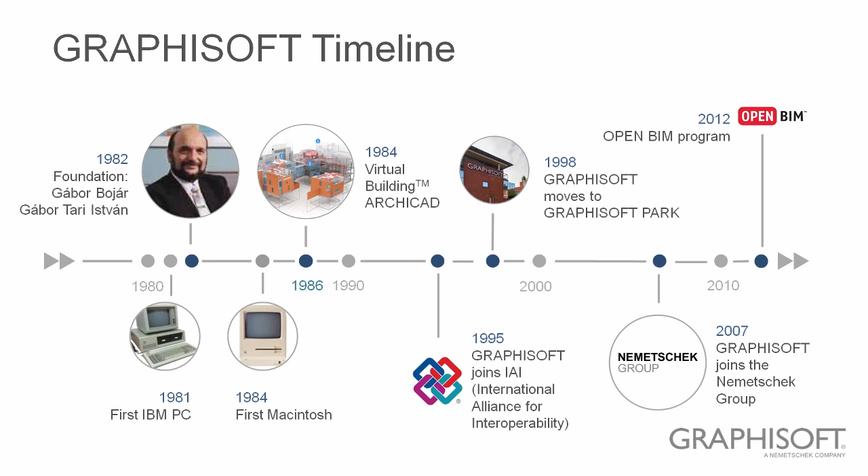This slide shows some important details in the lifetime of Graphisoft. You can see the portrait of our founder, Gabor Bojar, who already in 1982, one year after the commercial introduction of the very first personal computer, succeeded in writing a computer program for 3D modeling and clash detection on a PC. Soon after, our founder discovered that the best customers for his invention were architects. So ArchiCAD, the first BIM application for architectural design, was born. Only at that time, we called our method virtual building, not building information modeling.

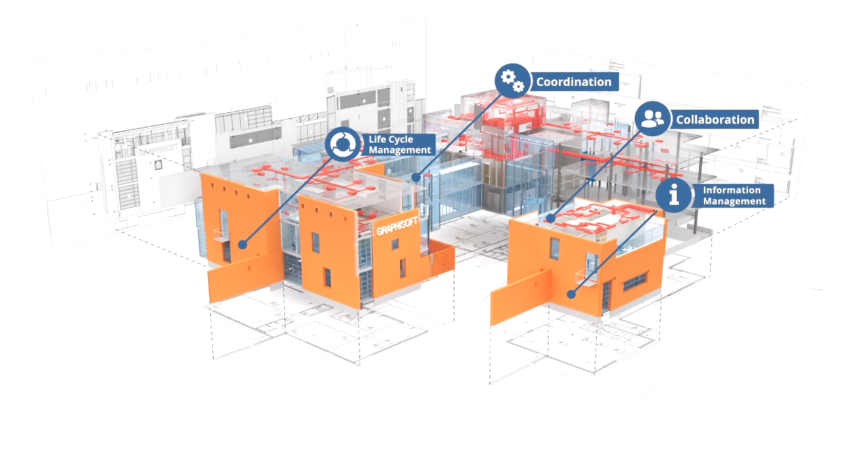What do we mean by BIM? What is building information modeling? Well, according to the AIA, BIM is mainly concerned with the digital representation of buildings, but has also many other aspects, like shared information, where you collaborate with the different stakeholders of the construction project throughout its entire life cycle. In my presentation, I will try to discover all these aspects and show you how you can do building information modeling with Graphisoft solutions.

Graphisoft's solution ecosystem is all about building information modeling. ArchiCAD, our BIM authoring tool, is the preferred design tool of more than 200,000 architects worldwide. BIM Server and BIM Cloud are solutions for smooth and intelligent collaboration for architectural design teams of any size. With BIMX, for BIM Data Access, our award-winning mobile application, even non-professionals can easily access and view the BIM models which were created by ArchiCAD.

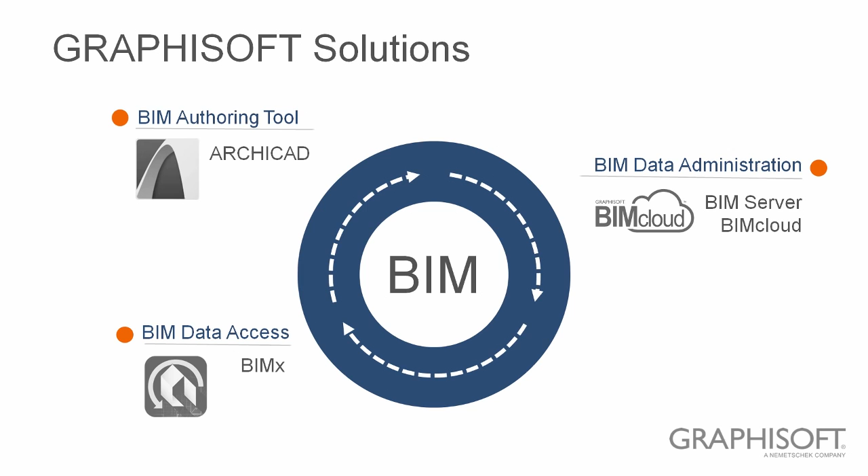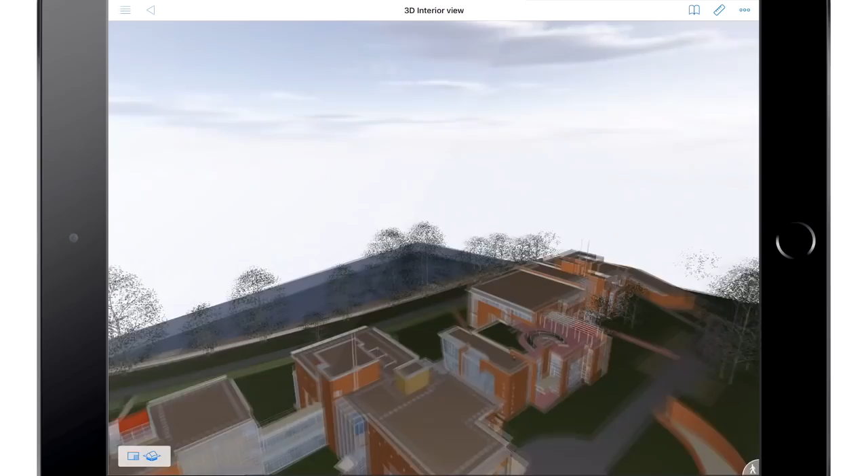Let me start my presentation with BIMX. You might have noticed I have already been showing you these slides in BIMX. BIMX is also a great presentation tool. You can freely download it from the App Store. I'm just switching to the 3D model to show you our headquarters in Budapest. These are the two buildings where all the software development of our superb products is taking place.

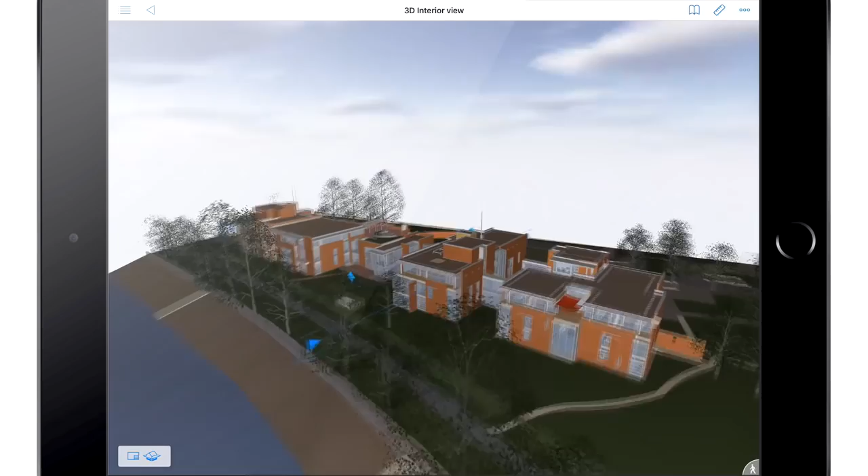The facility itself comprises two main buildings designed by two famous Hungarian architectural firms, Építész Studio and Lukács and Vikár Architects. See how easy it is to visualize the BIM model and orbit around. With the pinch zoom, you can explore any detail from the outside or from the inside. Let's zoom a bit closer to the front door.

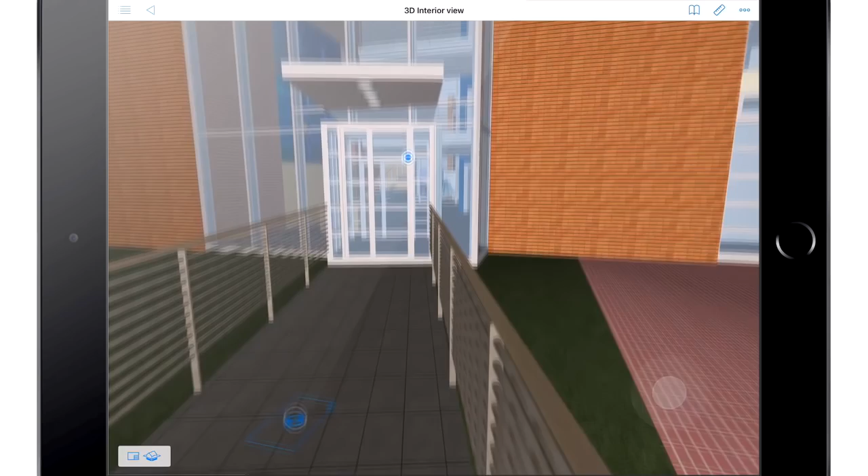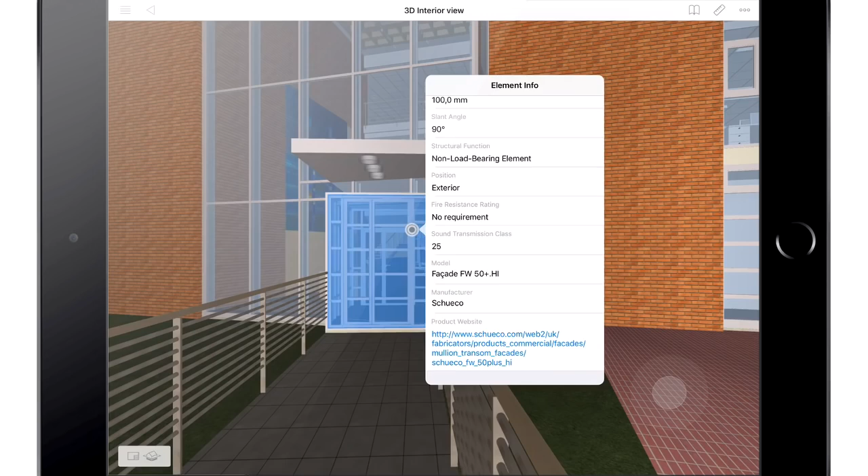Building information modeling is all about information. You notice a rich set of metadata can be attached to the model elements. Even web links can be attached to building elements in ArchiCAD. These then can take you to the manufacturer's website for further information about the end product. These capabilities make the BIM model the perfect information management platform for the entire life cycle of the project.

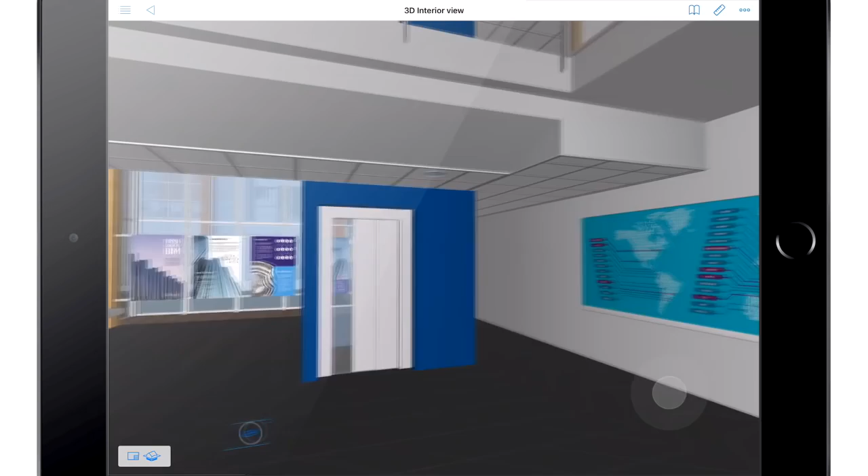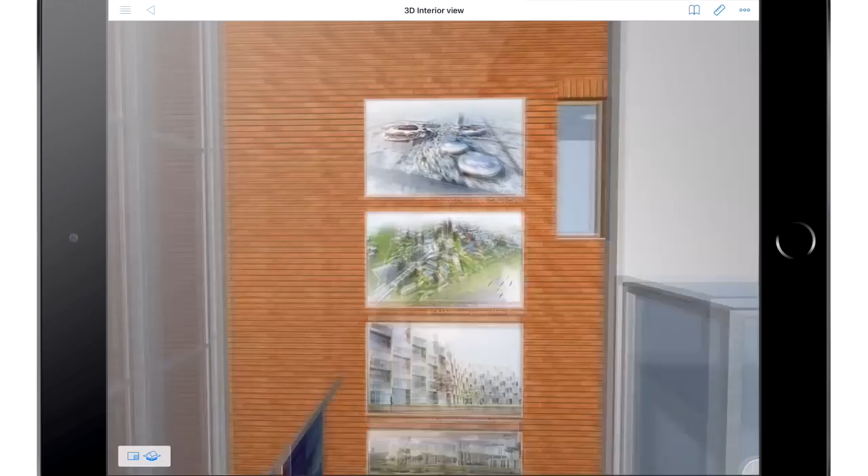Let's go inside the building. You can easily walk around just as if you were playing a computer game. This map shows all the locations in the world where we have direct or indirect representations. Let's walk upstairs. These virtual tours help the clients better understand the design and get familiar with the relations between interior spaces.

Please note these great projects on the wall. All these buildings were designed with ArchiCAD by famous architectural design offices such as BIG, UNStudio, and others.

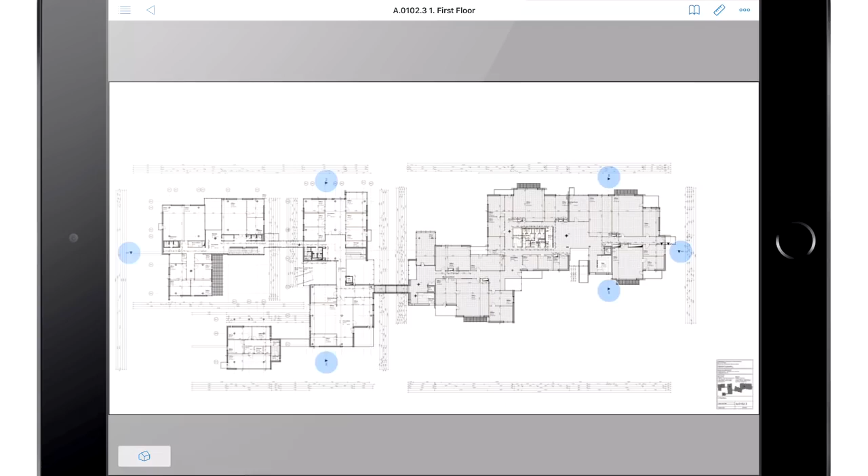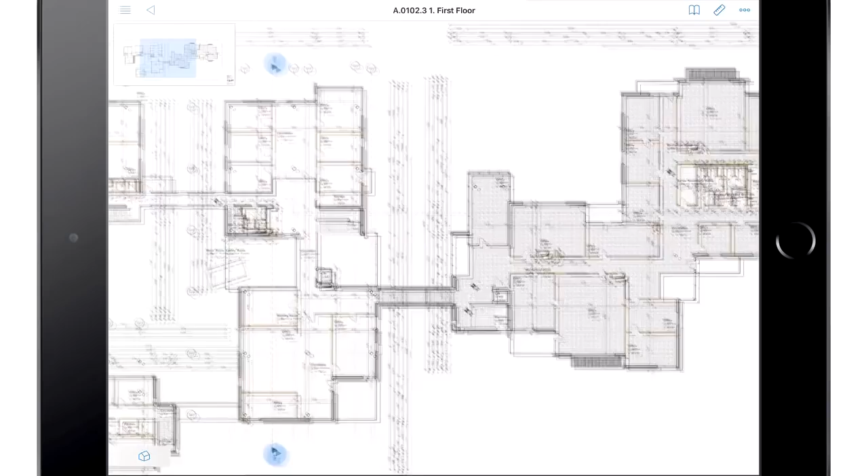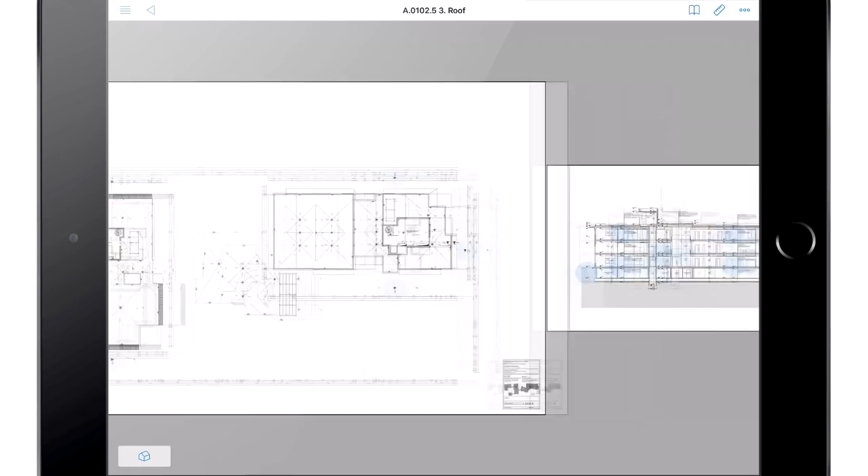Not only the 3D model, but also the entire construction documentation can be stored and viewed in our BIMX app. It means paperless construction sites. Construction managers can just walk about the construction site with an iPad in their hand, having the entire construction documentation at their fingertips.

A unique feature of BIMX is that any 2D document can be placed in context of the 3D model, and the 3D model can be cut by the 2D document. This allows for much better understanding of the 2D documentation when viewed together with the 3D model.

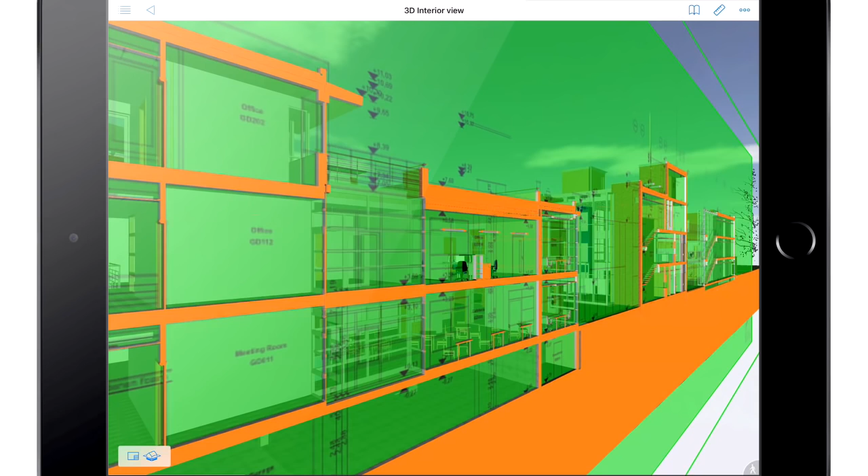Like in the case of this section view, it is much easier for non-industry professionals to understand the 2D information when the section is placed across the 3D model. You can also move the 3D cutting plane to reveal the interior structure of the building at any location.

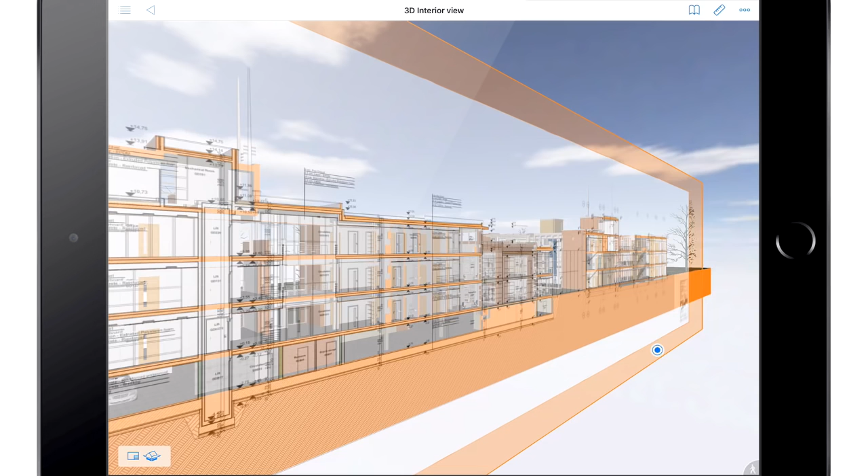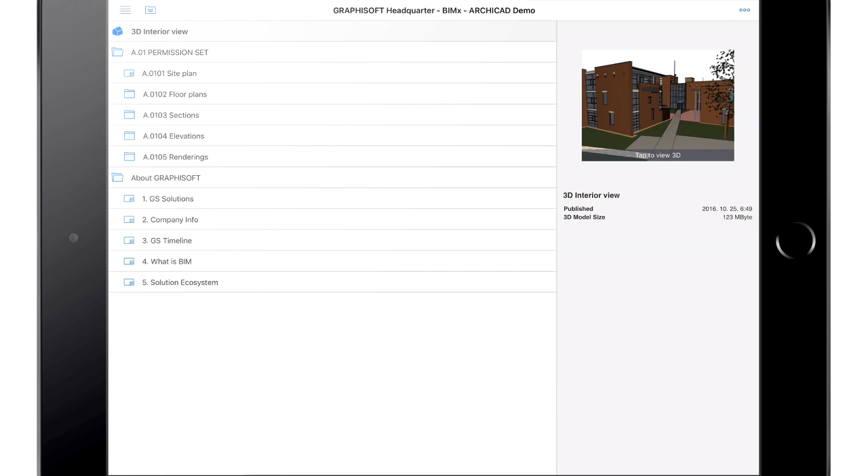Now that you have seen how simply you can access and view the BIM model in BIMX, let me show you how easily you can create the BIM model in ArchiCAD. Firstly, I would like to show you that ArchiCAD is a true BIM authoring application. Then, I will show you that ArchiCAD is very intuitive, and you can have lots of fun while working with it. Lastly, I will give you everyday examples for how you can boost your productivity when working in ArchiCAD correctly in the BIM way. Let's see now what it means to work in ArchiCAD in a true BIM fashion.

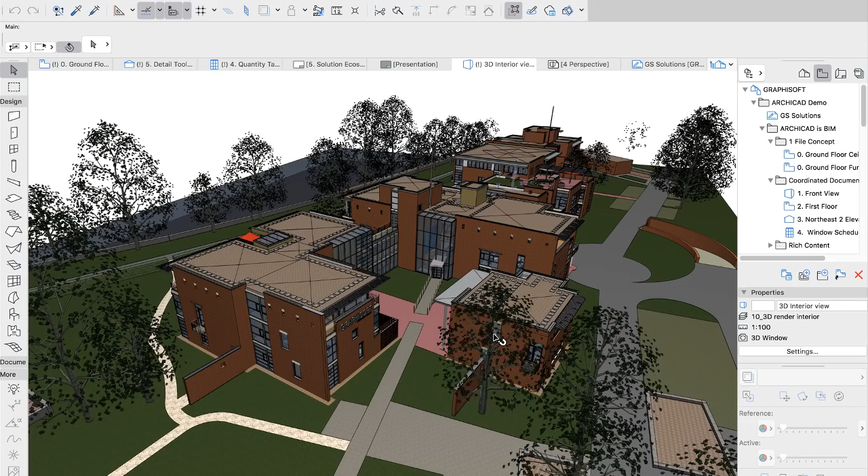This is the same 3D view which you have seen in BIMx. We are just now in ArchiCAD.

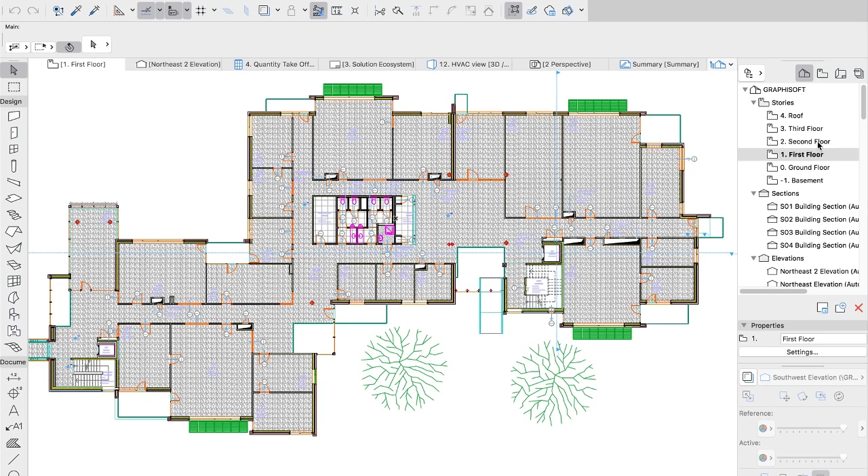Having a building information model in ArchiCAD means all the project-related documentation is stored within a single project file. The Navigator tool allows you to easily overview and access any part of the documentation. For example, in this case, I am browsing among the floor plans, sections, and elevations.

The information and its graphical representation on a view depends on the architectural context. For example, the false ceiling plan has completely different content and style of representation than the furniture layout.

Navigator allows you to save and organize the different views of your BIM model in a fully customizable folder structure so that you can quickly access them at any time.

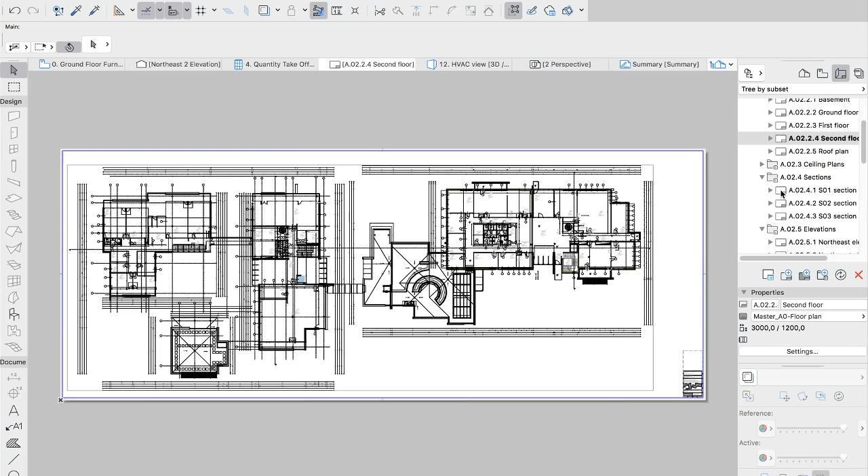Not only the building model related information, but also all the relevant drawings, schedules, and layouts are stored in the project file. All the drawings which make the architectural documentation complete are also an integrated part of the ArchiCAD project. In Navigator, the layout book lets you create and organize your final architectural layouts in any fashion you like.

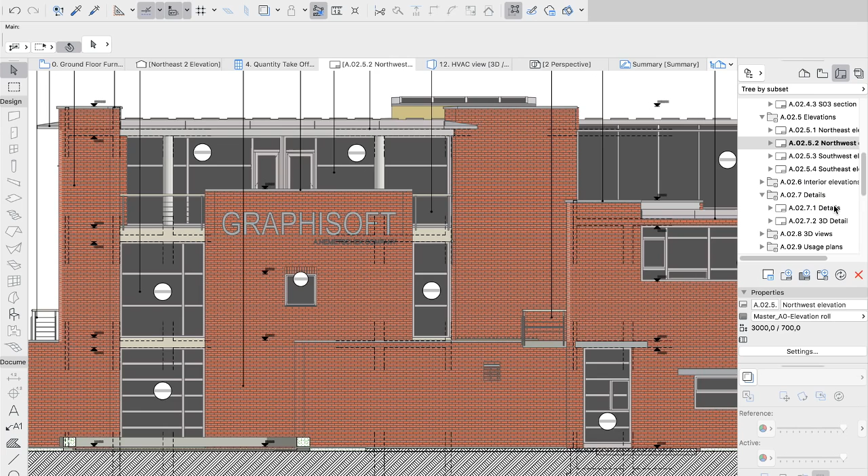The most important aspect of building information modeling is that all of the documentation, all of the different views, are live links to the central building information model. Therefore, you need to make a modification just once in a view, and all other views update instantly. Your documentation stays coordinated at all times. Let's look at an example.

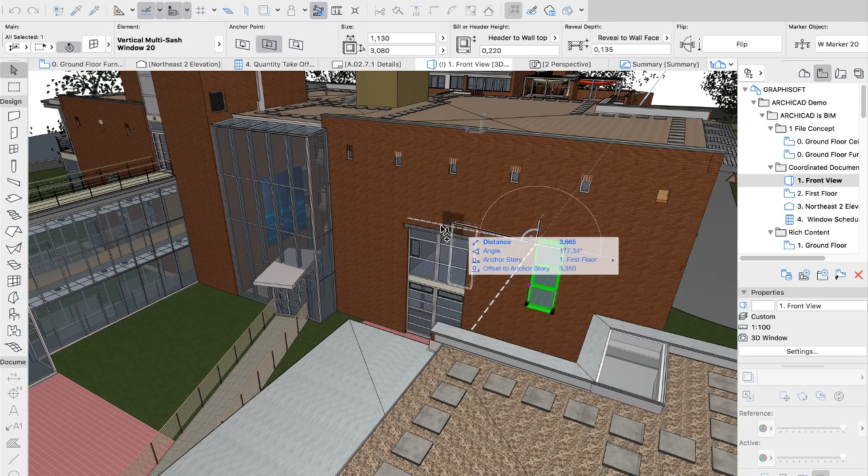You can modify the BIM in any view you like. Let's create a copy of this window right here in the 3D perspective view. As you can see, it is a very simple exercise. You can easily work accurately in the perspective view with help of ArchiCAD's guidelines.

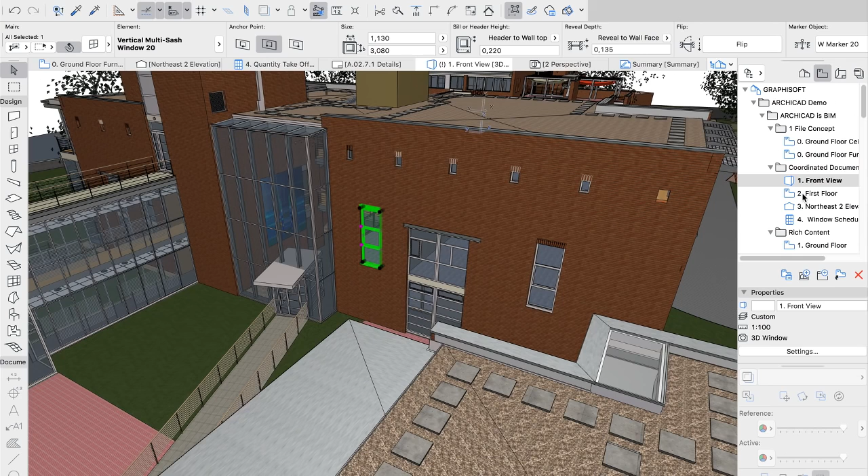Now let's have a look at the floor plan. As you can see, the window we duplicated in the 3D view is showing correctly on the floor plan. Let's see how easily you can further fine-tune this window.

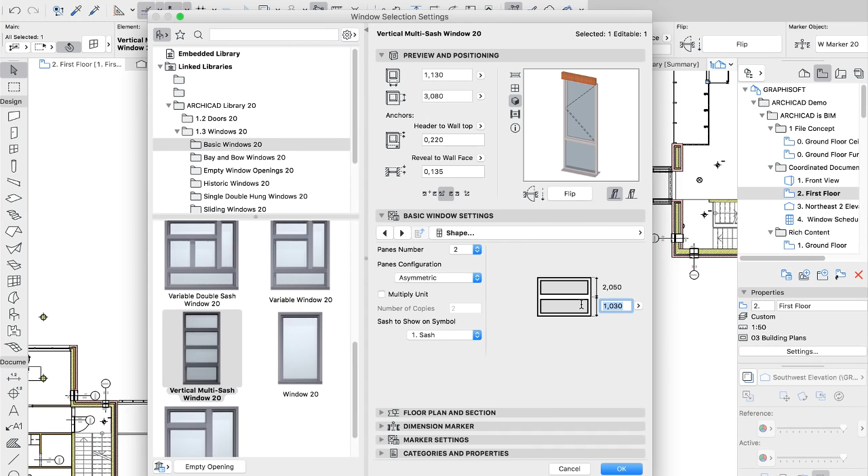Windows, doors, and objects in ArchiCAD are parametric library parts. One object can store a complete product range. They can represent plenty of variations of a construction element. You can comfortably edit the different window parameters through a user-friendly graphical interface. Let's modify the number of window panes and the bottom pane height.

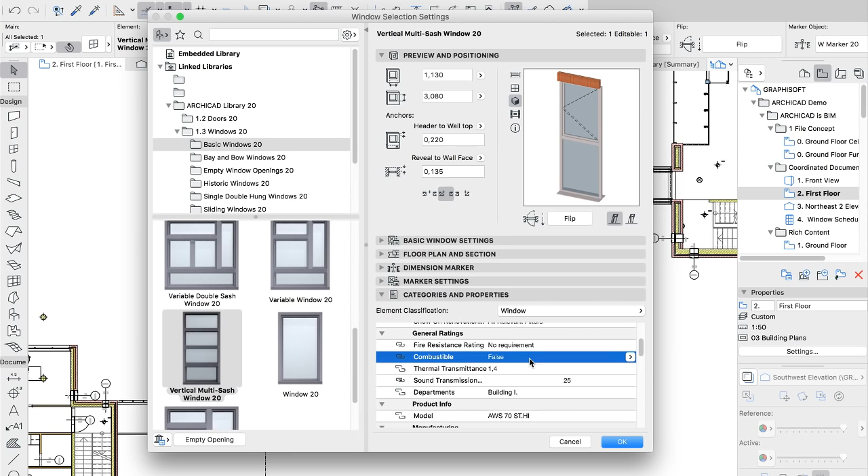Building information modeling means, in addition to the physical parameters, you can store a rich set of metadata with the building elements. For instance, in case of this window object, we can access its fire resistance rating, sound transmission, and many other important properties. The geometry of a window can be edited graphically in the 3D window or in an elevation view. For example, I can easily stretch the height of this window or change its transom height to align with the other. Graphical editing makes the use of ArchiCAD really enjoyable for architects.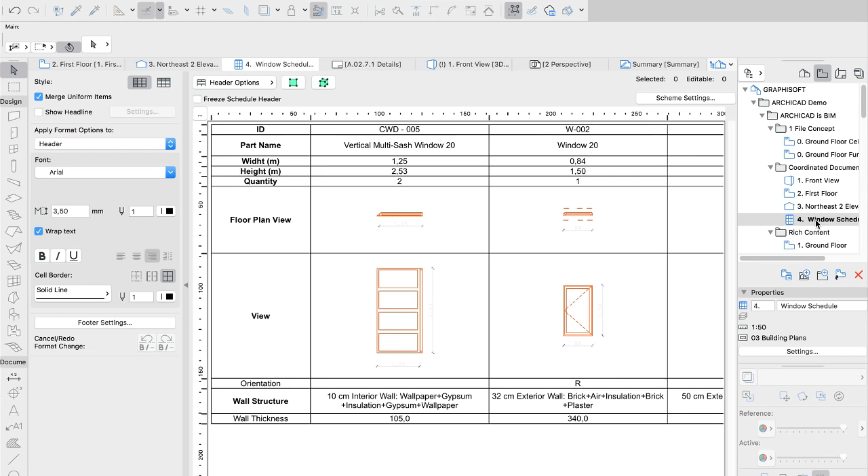At any stage of the project, you can instantly extract any information of the building information model as lists or schedules. Even graphic schedules can be created. Let's take this window schedule as an example.

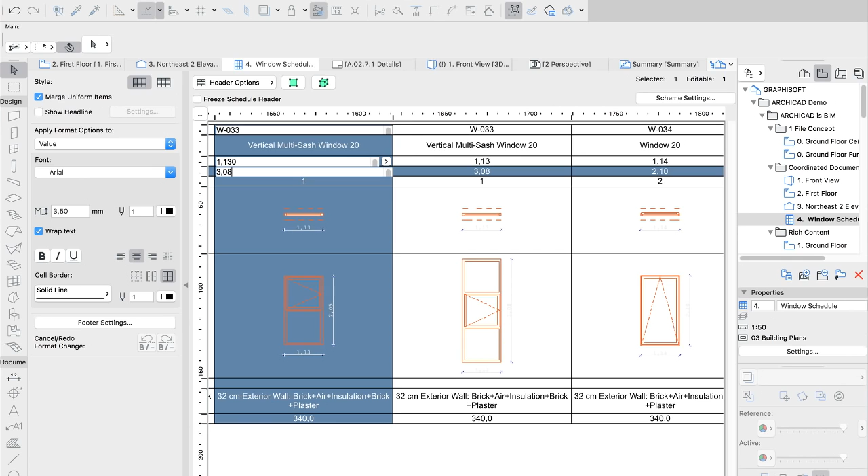Just like in any other views in ArchiCAD, you can edit the model elements also in schedules. Let's change the height of this window to be exactly the same as this other window, 3 meters and 8 centimeters. Let's check our elevation. As you can see, the elevation has been updated and the window height has been changed.

You now probably realize how much time and effort can be saved by working in a real building information modeling fashion. You only have to build up your building information model once, and any changes you make will be automatically updated in all other views instantly.

ArchiCAD offers a huge productivity gain compared to traditional 2D CAD-based workflows. ArchiCAD significantly reduces the time spent on project modifications.

Another important aspect of a BIM application is the type of local content that comes with the software, and how easy is it to customize these ready-made construction elements. To check this out, let's first visualize only part of this model with help of the marquee tool and furnish the entrance hall with some seating furniture.

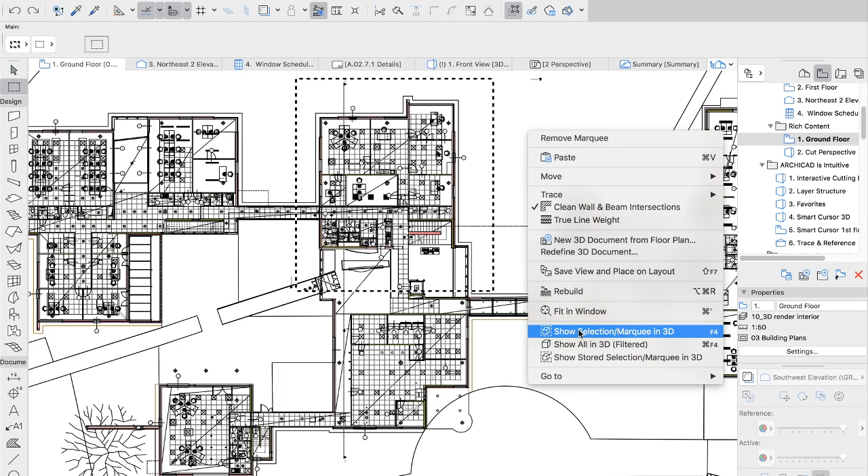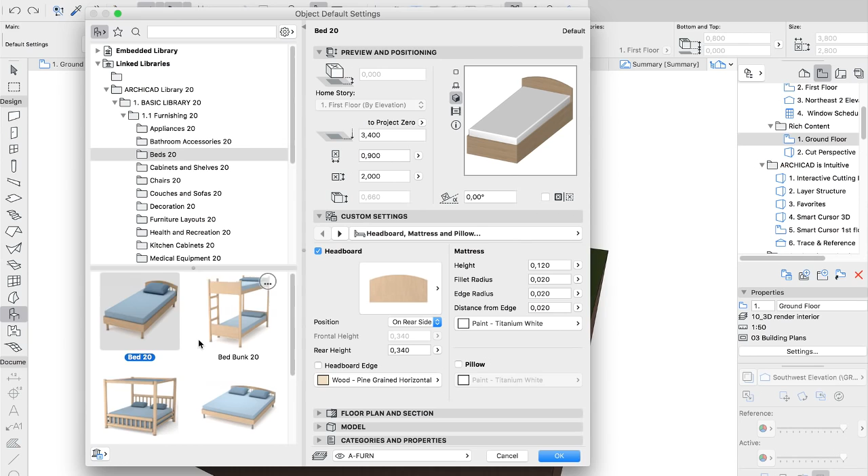ArchiCAD comes with a pre-installed library of more than 1,000 generic architectural elements. These objects are parametric in their finest details and are customized to your local standards. Through changing their parameters, these elements can represent numberless different products, all in very compact file sizes, due to the smart GDL programming language invented by Graphisoft.

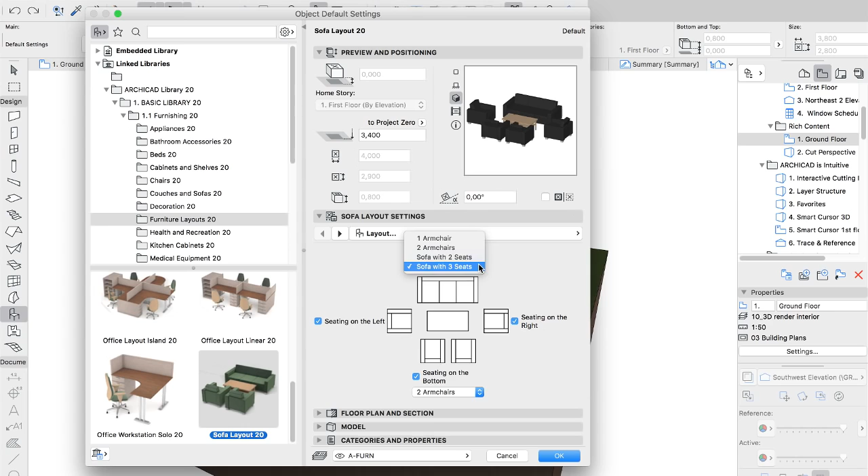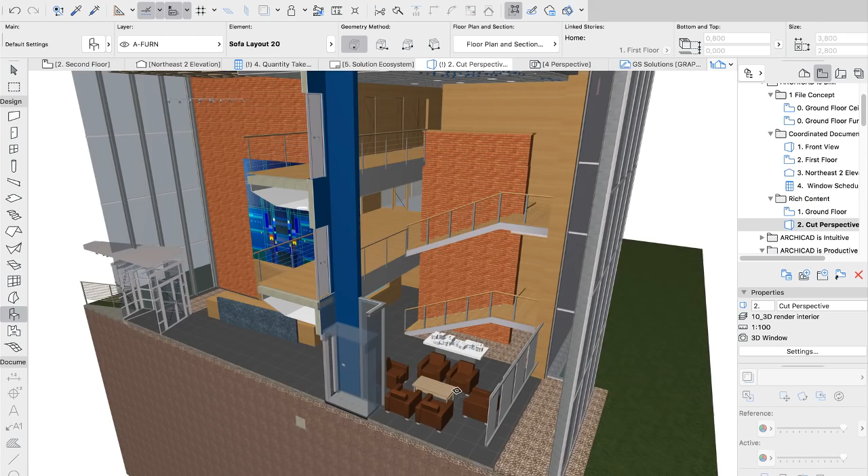For example, let's change the layout of this furniture piece. You can easily modify the number and type of sofas on each side. Let's have 2 armchairs on the top side, just like we have them on the bottom side. Besides the geometry, 2D representation as well as the materials of the objects can be freely customized. Let's change the materials of the armchairs to be leather. And voila! With only a single click, you can place the object into the entrance hall.

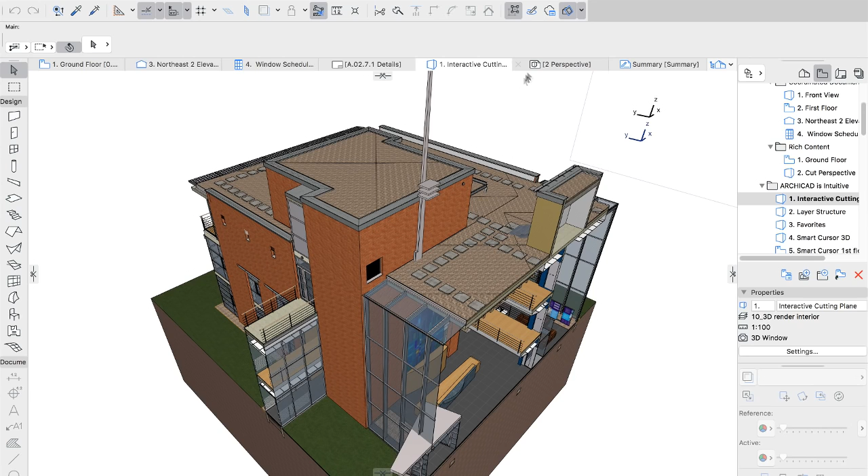So far, I have shown you the essence of what it means to work with ArchiCAD, a true BIM authoring tool. You have seen how much time and effort can be saved when working with a building information model. In the next part of my presentation, I would like to show you some intuitive solutions that will make working in ArchiCAD lots of fun. After all, it is very important that you like working with the tool you spend most of your day with.

When elaborating a small portion of a large model, it is imperative that you can easily cut down the model to the actual part you want to be editing. Interactive cutting planes provide a simple way to reveal the internal parts of the model. Besides its practicality, it is also very spectacular and fun to use, isn't it?

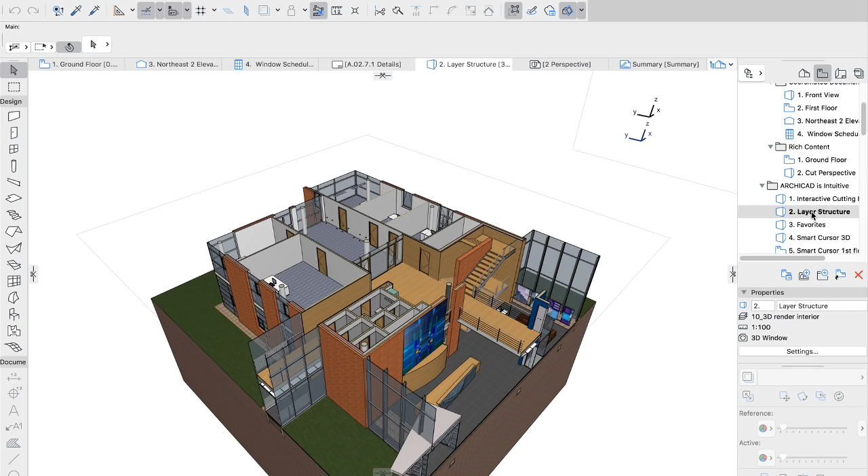ArchiCAD has a layer structure, which can be very helpful in organizing information in a logical manner. With the help of switching off layers, you can quickly eliminate the model content you do not want to work on. Layers also help AutoCAD-based offices to convert their office standards to the new BIM environment.

ArchiCAD is known for its user-friendly BIM modeling solutions. Let me illustrate it with a little exercise. Let's divide up this office and place a partition in the middle.

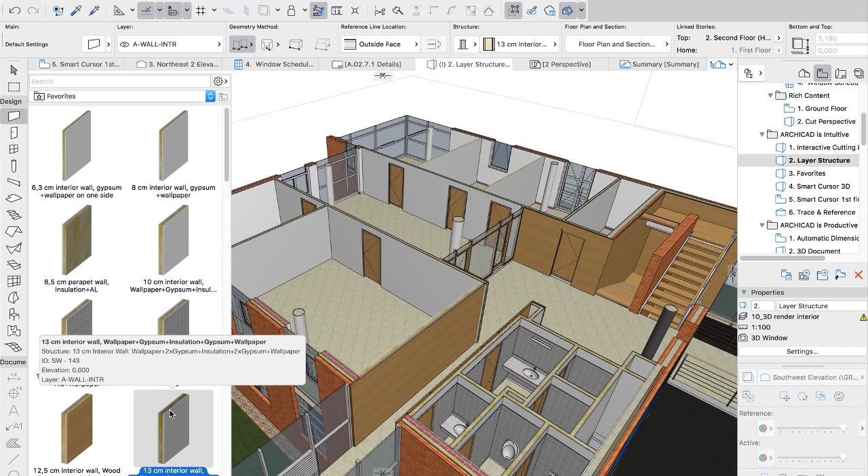You can select the type of wall you prefer with the help of ArchiCAD's graphical favorites functionality. A favorite stores all the parameters of an ArchiCAD tool. Thus, it helps a lot to promote standards within the architectural office. Like in this case, the partition is made up of a double layer of plasterboards.

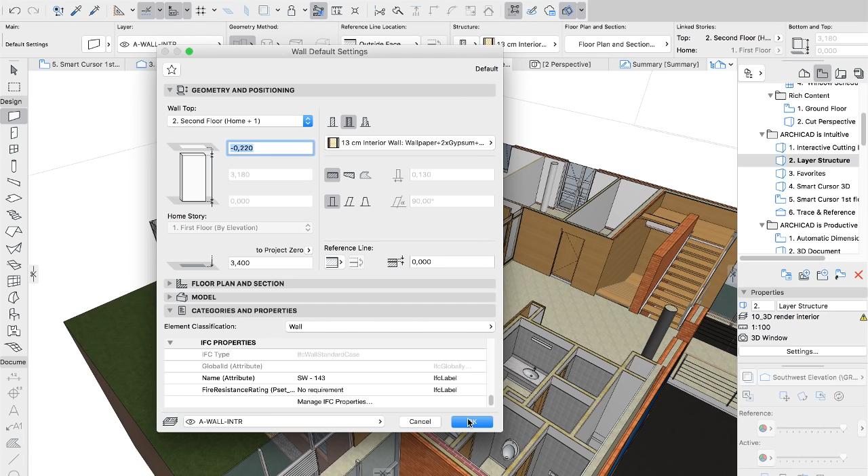Building information modeling also means you can store additional data with your model elements. For example, all the exact physical characteristics of the wall can be detailed and stored with the Wall tool.

To work in ArchiCAD accurately is simple in any view. With the help of the Smart Cursor and intersection points, you can easily snap to any elements, like in this case, the halving point or the perpendicular point.

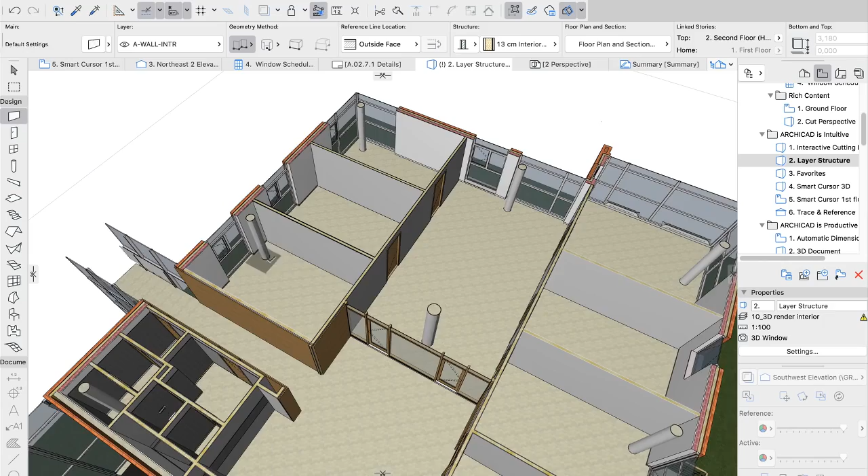Let's have a closer look at this T-junction. The buildup of our newly placed partition is different to the other partitions. We do not need a double layer of gypsum boarding. How can we change this partition to be exactly the same as the others?

In ArchiCAD, there is a smart way of picking up the parameters of an element and transferring them to another. With the help of the pipette, you can just click any element to pick up its parameters, and with the help of the syringe, you can transfer them to another element. It's so easy to instantly modify elements.

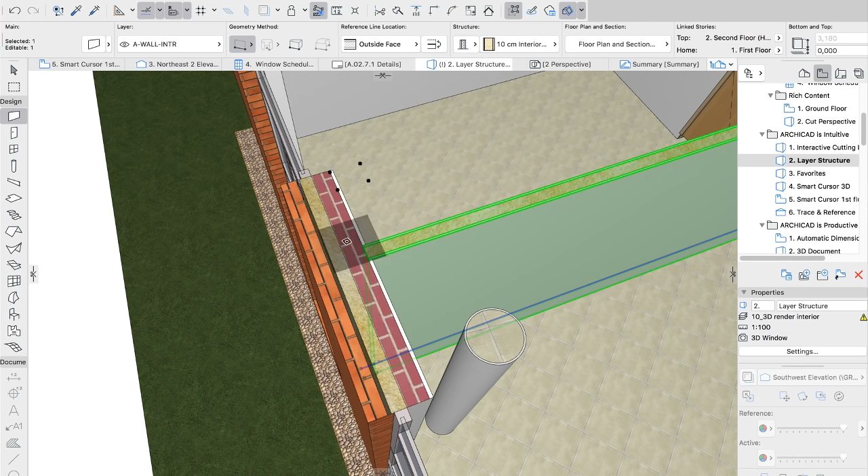Now let me talk about the accuracy and the level of details in ArchiCAD. Let's see the other end of this partition and examine its connection with the external wall. As you can see, the wall composites are not connecting properly. The gypsum boards are cutting into the plaster of the external wall.

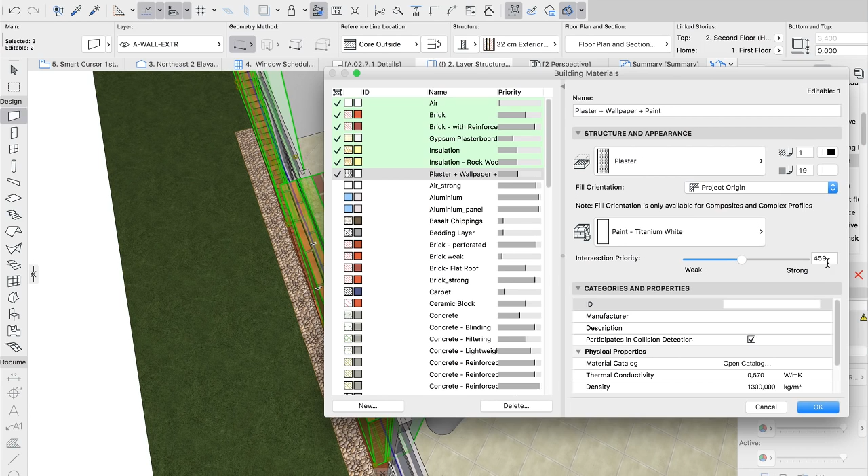This is easy to change since intersections in ArchiCAD are handled automatically via building material properties. Just select the two composites and adjust the intersection priority of the plaster to be stronger. Here it is. The wall junction is now correct.

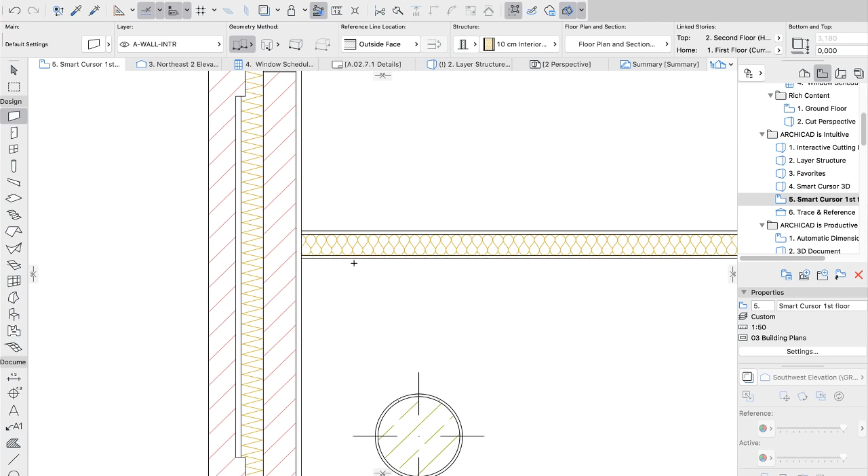Intersection priorities, based on building materials, make sure the connection of composite structures will be 100% correct on all views of the project. Furthermore, the bill of quantities extracted from the BIM models will be very precise, allowing contractors to achieve a high level of accuracy in their cost estimations.

Next, let's edit the boundary of this wall. In ArchiCAD, there is a consistent and really graphical method for editing BIM elements. The Pet palette is at your fingertips when you need to quickly edit a placed item in ArchiCAD.

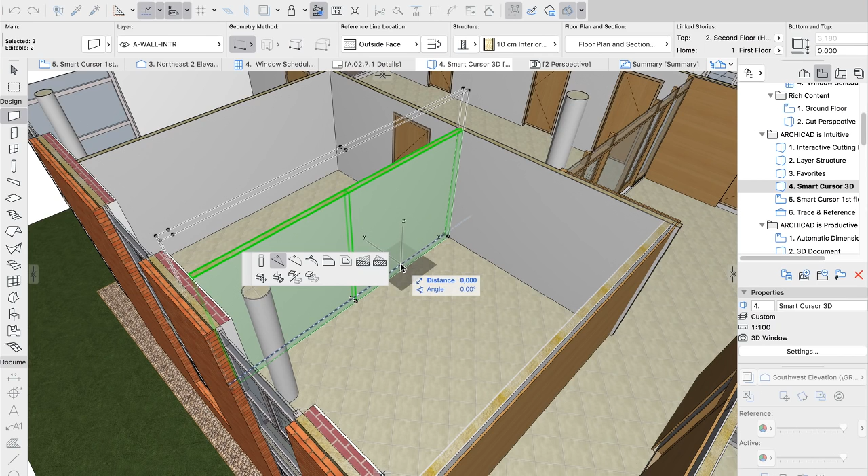Let's create a curve on this wall segment here in the 3D window. The Pet palette works similarly in any view. You can bend the other segment of this wall just like you did in 3D before. With the help of the Pet palette, editing elements in ArchiCAD is easy and fun.

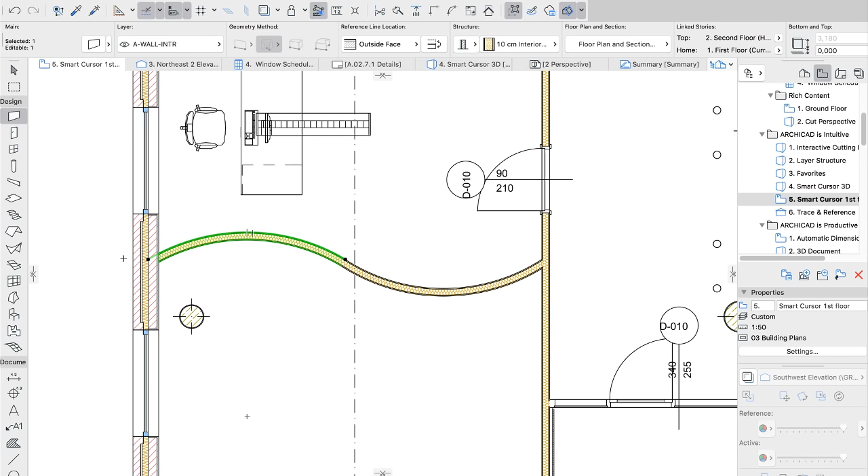While working in a section view, often you would need to see where your edited element is located on the floor plan. Trace and reference functionality allows you to trace your current view on top of another. I can instantly change the color of the traced view to have better visibility.

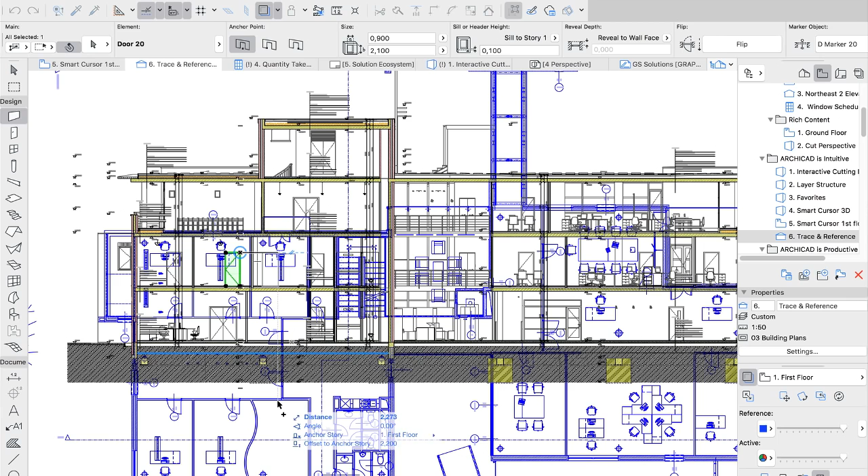Trace and reference is a great help, getting instant feedback about your edited element rather than having to switch between different views. Besides, trace and reference can also help you convert your existing 2D CAD drawings into real BIM models.

So far, I have shown you a couple of intuitive features that make your work in ArchiCAD so much fun. Now I would like to concentrate on those functionalities which will help you be more productive. At the end of the day, architects get paid for their design, and the end product of their design is the documentation. Let's see a few nice touches in ArchiCAD which will help you create the documentation faster.

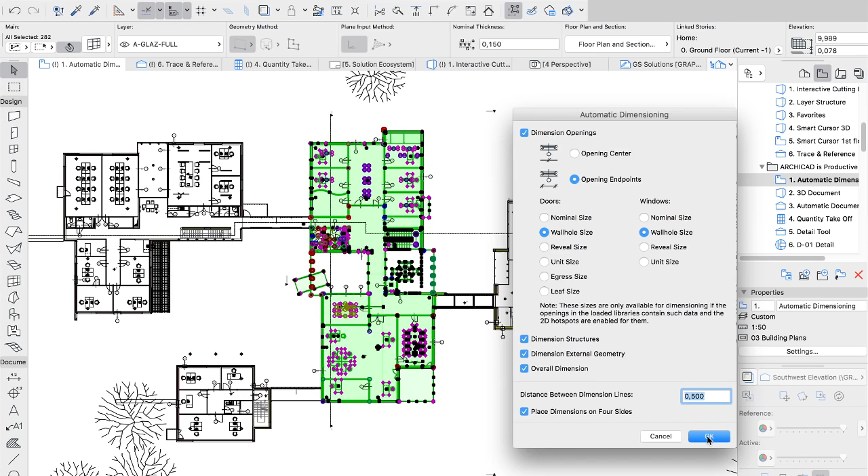First, let's have a look at dimensioning. Automatic dimensioning is a typical functionality which allows you to spend more time on design and less on repetitive documentation chores. You just need to select the elements you want to dimension, and ArchiCAD will do the rest for you. Of course, these dimensions are associative. They update automatically as you modify the dimensioned elements.

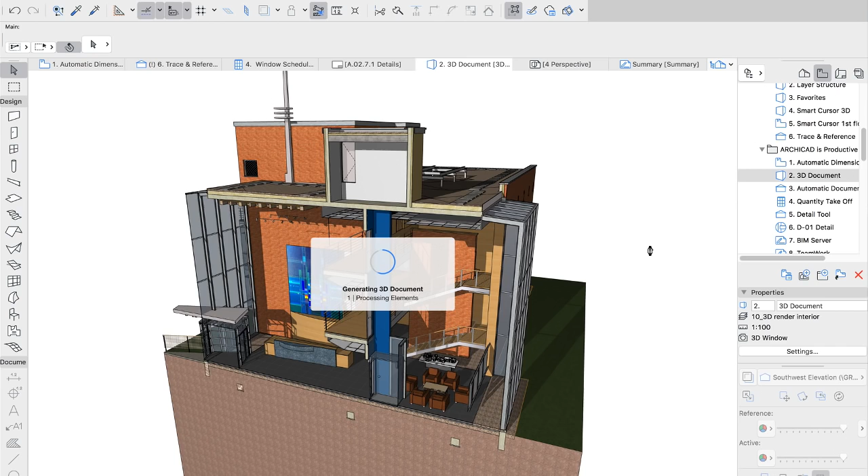There's another great time saver functionality, the 3D document. One 3D view can tell a lot more about the design intent than plenty of 2D drawings. Therefore, 3D documents are really useful for conveying the design intent to clients or contractors. Let's see an example. To make the 3D view more plastic and beautiful, let's add a bit of sun shadows.

You can even add dimensioning within the perspective environment. Let's place a dimension line. As easily as this, you can dimension model elements in this perspective view.

Now let's place some labels. As you can see, the information of the model elements, like the building materials in this case, can be retrieved even in this graphical view. 3D documents enhance design communication with contractors and clients by revealing complex details of your buildings.

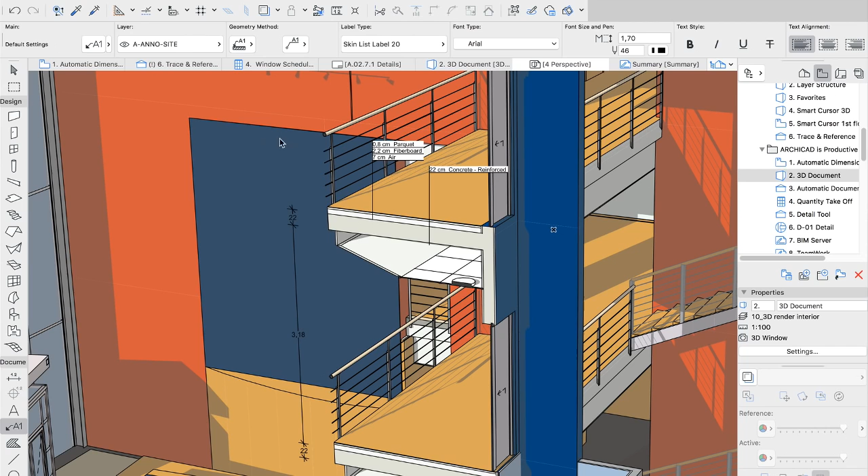Your construction documentation can be automatically derived from the BIM without additional 2D drafting work. As a result of intersection priorities based on building materials, not only the representation of construction elements will be correct, but also the quantities derived from the building information model will be accurate. Exact quantity takeoffs can be created with just a few clicks.

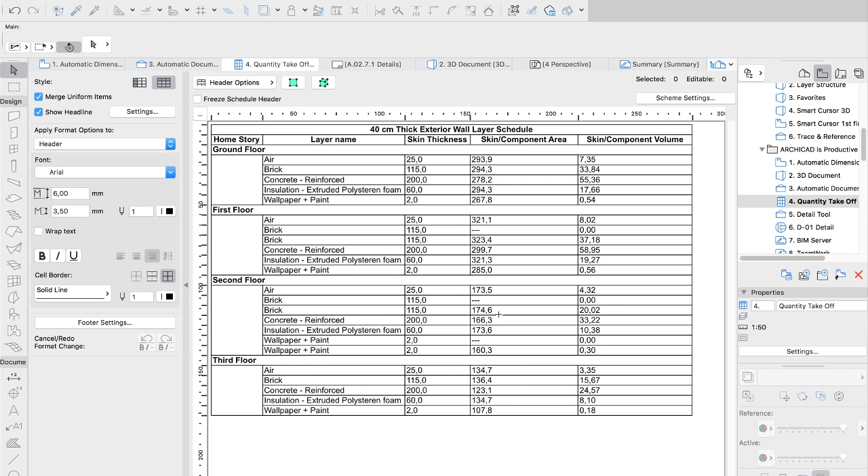When it comes to creating details in larger scale, you can use ArchiCAD's dedicated detail tool. The model elements within the detail's boundary will be automatically clipped into the details window, and you can use ArchiCAD's complete 2D toolbox to finalize them.

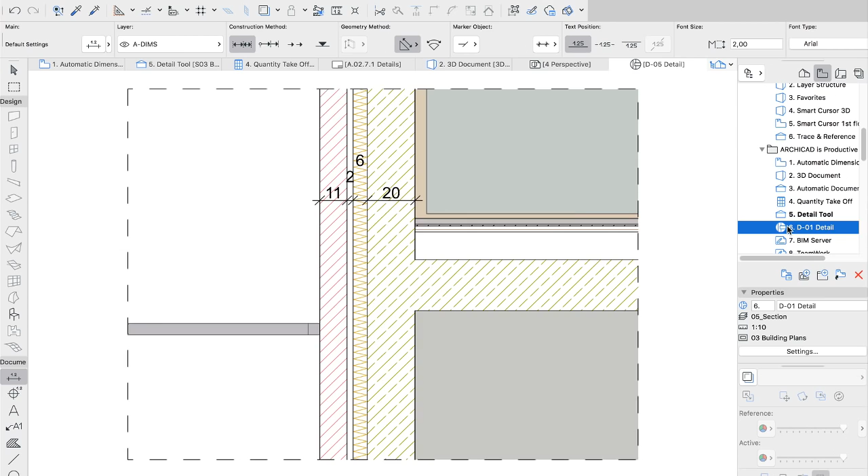For example, you can just place dimensions on the detail. Or like in this case, the detail was further elaborated by 2D lines, fills, and objects. No need to finalize your construction documentation in another CAD software.

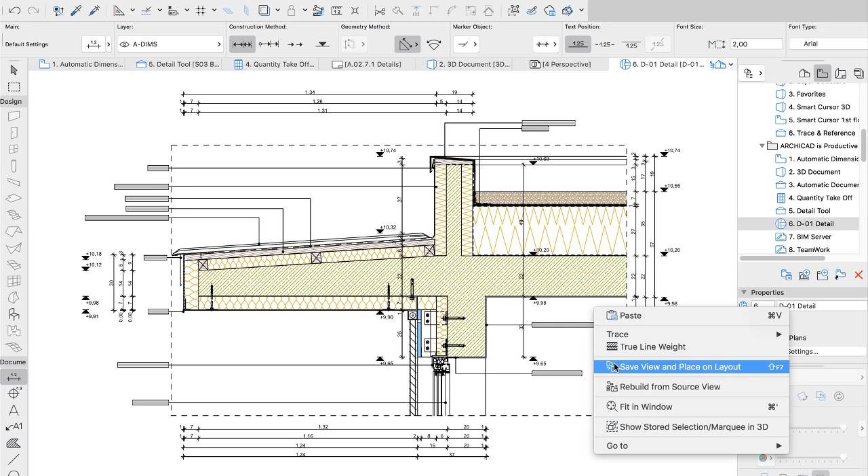When you have finalized the detail drawings, you can place them on predefined company standard layouts and arrange them with graphical methods. Note that these smart master layouts can manage automatic drawing numbering and naming. No need for tedious manual rework before publishing.

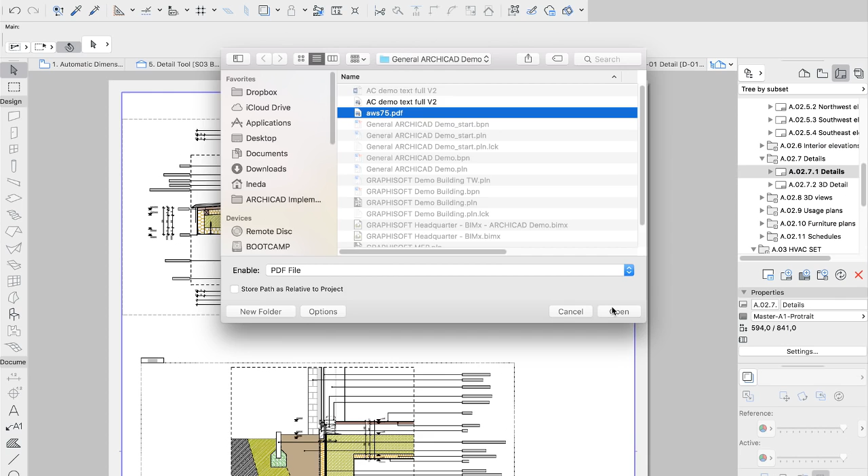You can easily incorporate any manufacturer's information within your documentation. Even PDF details can be placed on layouts.

You can also explode the PDF information into drawing primitives if you just want to use part of the detail. Like in this case, let's delete some of this window frame detail.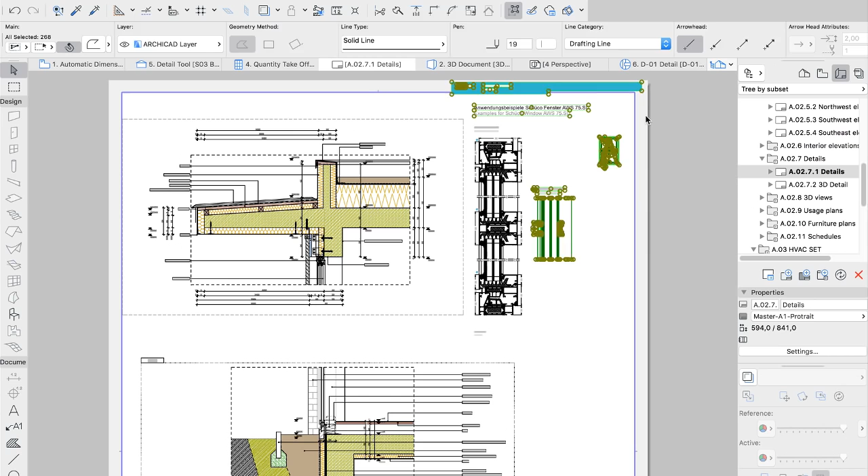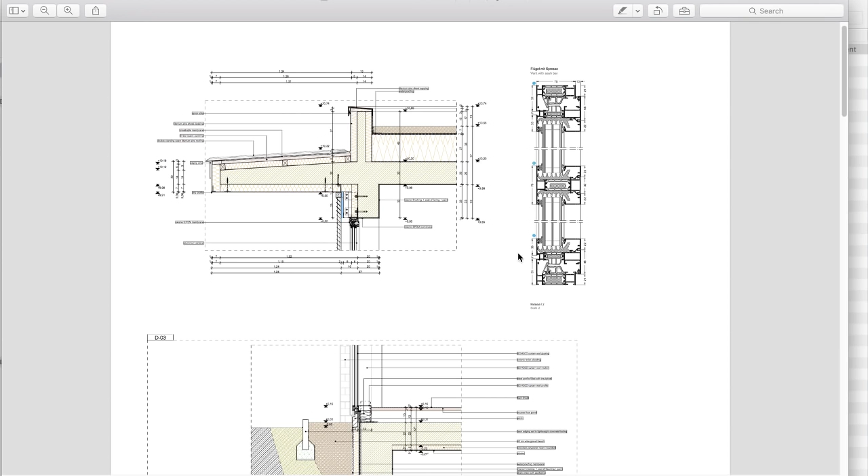To create the final documentation is a snap in ArchiCAD. You need to assemble the document set to be published only once. Any updated information is automatically represented on all the layouts, and the publishing takes just a click. In just a few seconds, you can browse the published documentation in the PDF document. In a very similar manner, you can publish DWG drawings, or if you prefer, you can print the entire documentation with just one click.

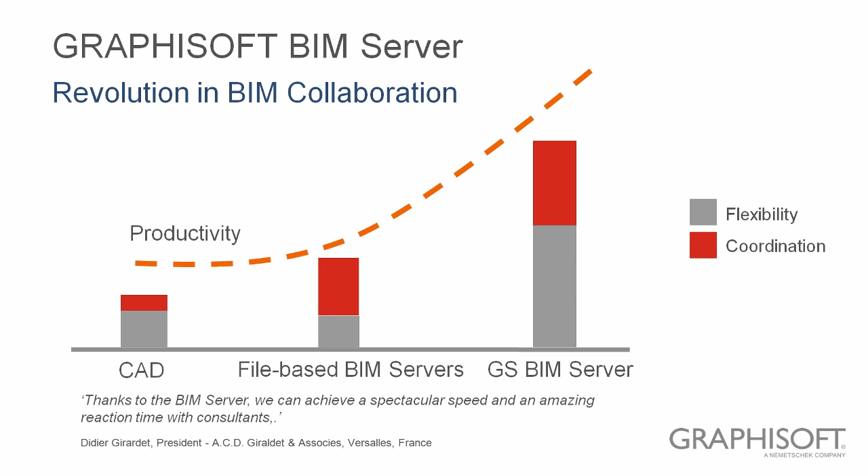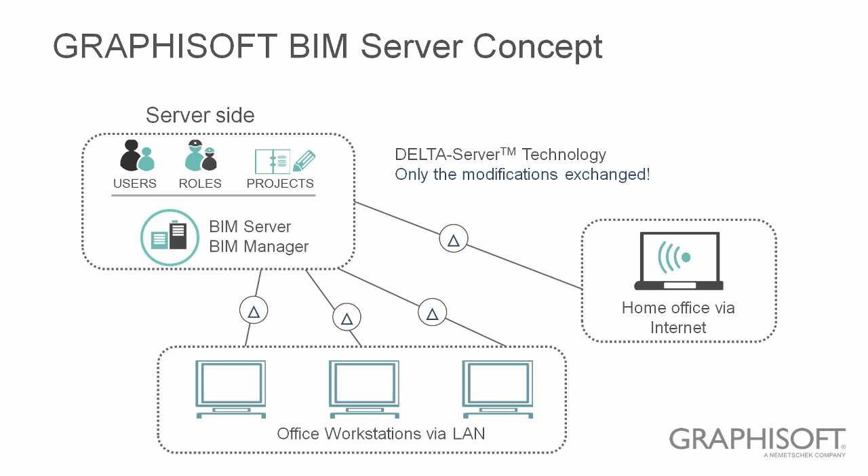Being productive in designing complex buildings means you need to work in a team efficiently. Graphisoft's teamwork concept supports a revolutionary workflow in BIM collaboration. BIM Server allows the online sharing of the BIM model amongst the entire design team without limit on the number of team members. Due to the unique Delta Server technology, only the modifications travel through the network. It allows team members to efficiently join the shared BIM model even via the internet. No heavy hardware specs for the server computer or high bandwidth network is needed.

Teamwork in ArchiCAD offers color coding to help with identifying the element ownerships. You can also use instant messaging to communicate with other team members in the context of BIM elements. Project managers can assign tasks to team members and precisely control the team members' roles.

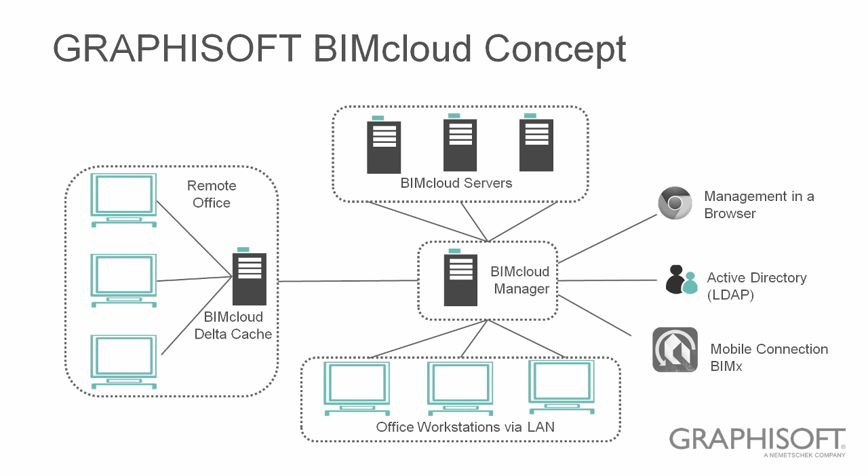For architectural firms having multiple offices working on large projects, we've developed our BIM Cloud solution. BIM Cloud enables multiple offices to collaborate via a common platform, the BIM Cloud Manager. No problem if several BIM Cloud Server computers are deployed in several different locations. Team members from different offices can work together as if they were sitting in the same office side by side. Teamwork messaging via BIMx app can extend team communication even onto the construction site.

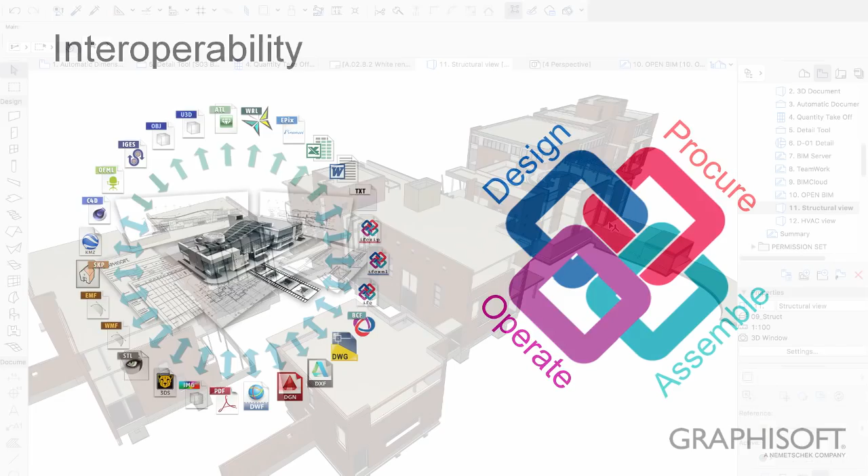Architects need to coordinate the design of other disciplines. Building information modeling has advantages also in the coordination of disciplines. Graphisoft advocates an open BIM program, which fosters BIM-based data exchange via open standards and workflows. Working via the open BIM method, designers of other disciplines are not tied to use a proprietary tool. Rather, they are free to select their own design tool based on their professional preferences. To exchange data with other disciplines, you must be able to easily distinguish the discipline's BIM content in your BIM tool.

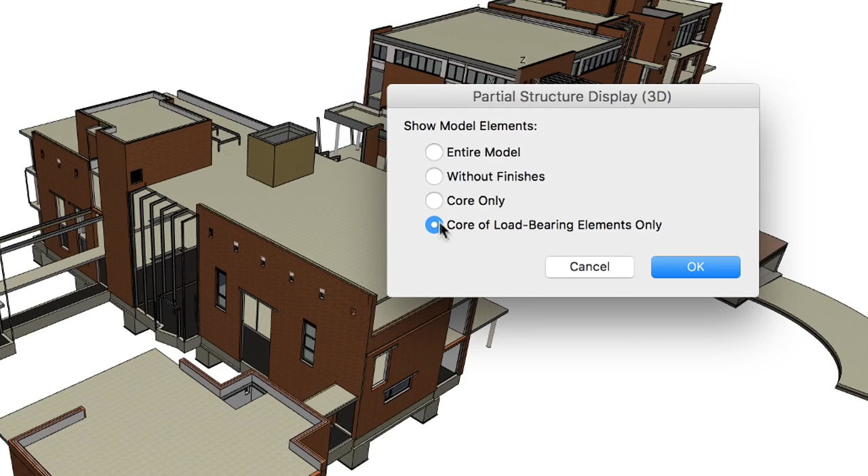Like in case of structural design, you should be able to visualize the structural part of the model easily. In ArchiCAD, there is a great solution for this: the partial structure display. This type of filtering is automatic and takes only one click. Now only the core of the load-bearing elements are visible. Having reduced down the model content to such a structural view will ease the collaboration with your structural engineer.

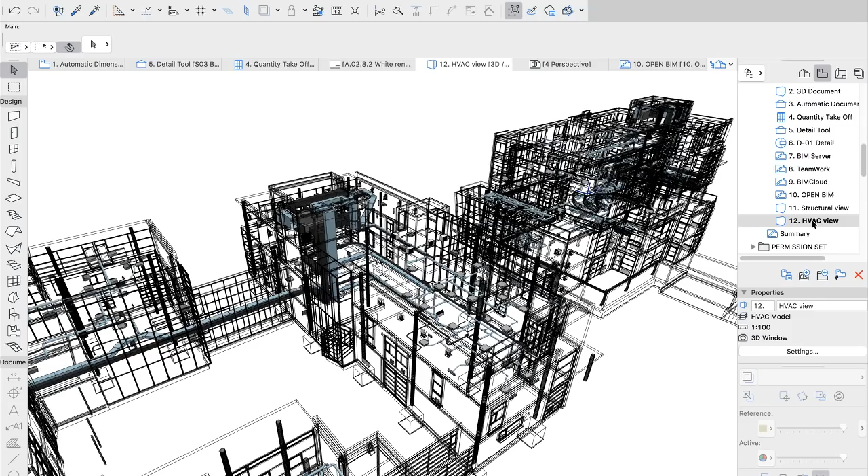Likewise, in ArchiCAD, you can easily model or import complex HVAC systems to include them within your architectural model. This way, you can have a federated model which contains the HVAC model elements as well. Then you can easily coordinate the HVAC layout with the architectural design. Even clash detection can be carried out, analyzing whether HVAC elements clash with structural ones or not.

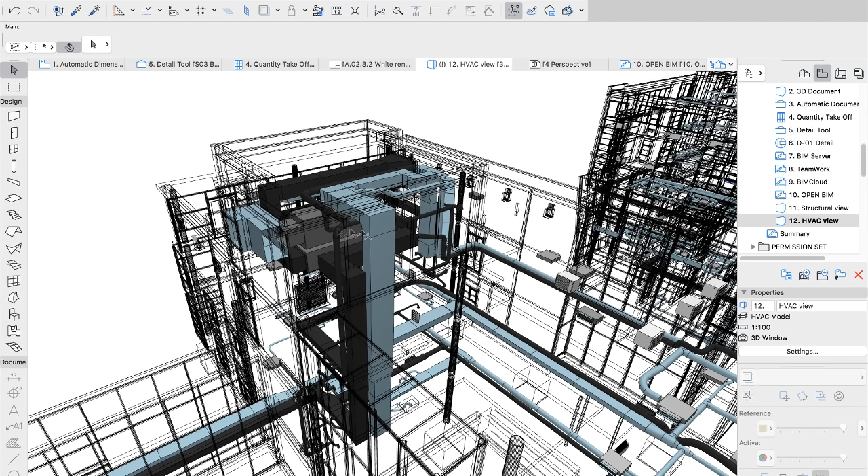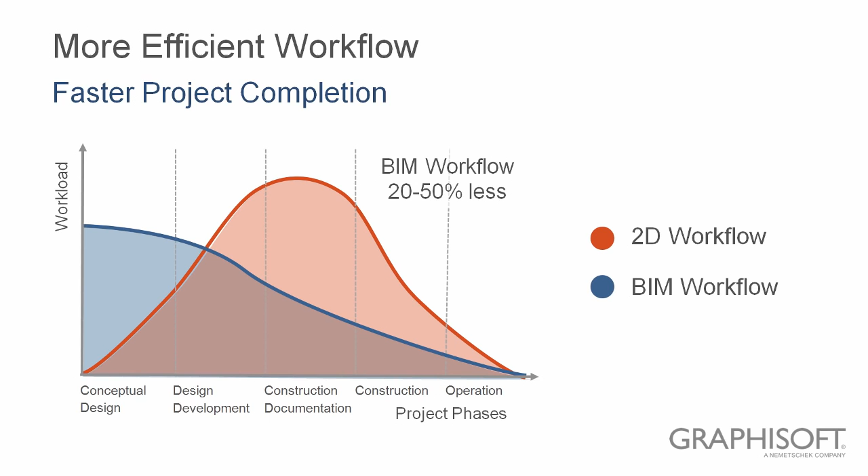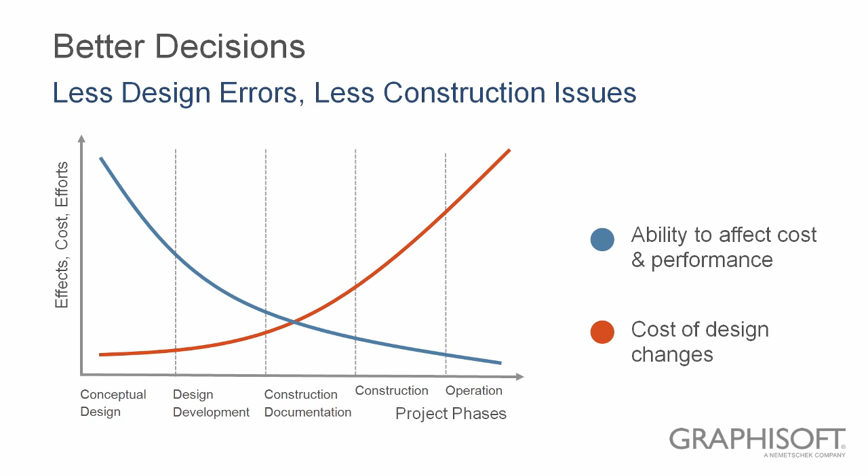This concludes my demonstration. I hope you liked what you've seen, and I have convinced you about the advantages of building information modeling over the traditional 2D CAD workflow. Overall, the BIM workflow provides you with a much more efficient workflow than 2D CAD workflows. According to feedback from our customers, you can save around 20 to 50% of the total time. Besides, with BIM, you can control your project much more efficiently and decide about important design issues earlier in the development phase. This can result in less design errors and construction issues, more profit for all stakeholders, and happier clients.